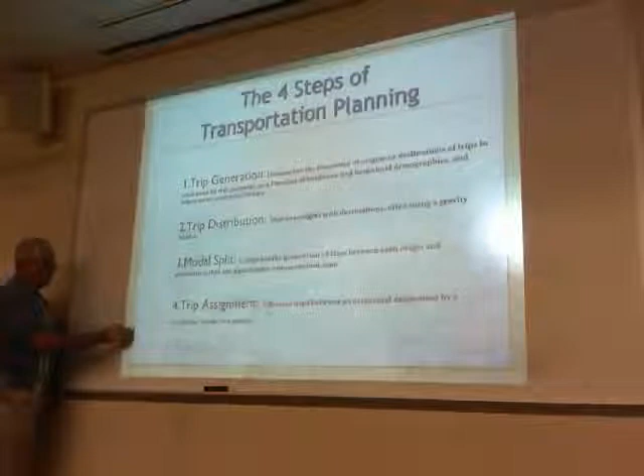So we will go to the Bible for trip generation that is published by ITE, the latest version, the 9th edition, which you got copies of appropriate to your assignment. And based on the land use, we come up with a number of daily trips and peak period hourly trips. Similarly for retail, whether it's a restaurant or what have you, the exact same. So these are generation because they're coming out of residential. For the retail, it's attraction. How many people come to the mall, to a shopping street on a daily basis and peak hour.

Once we establish that for every zone, for the current year and the 25-year horizon, then we will do trip distribution. So I have a trip T that originated from zone I and wants to go to zone J. The computer does that, calibrates, and achieves an equilibrium of every journey that goes from one region to another. So that's step 2. Step 3 is going to do some calibration and assessment. How many of those will take personal auto, bus, rail, bike, and what have you. That's what we call modal split. That could be personal vehicle, mass transit, ferry in some cases and such.

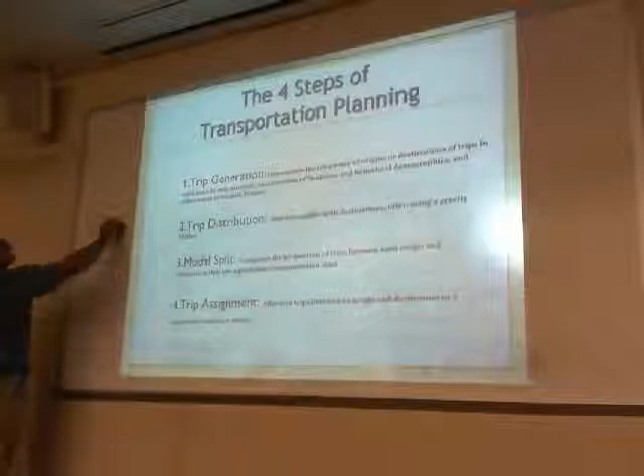Once that is done, then we need to assign those to specific roadways. So if so many trips T(IJ), now we know they're coming from zone I, they're going to zone J, they're using mode M. Now which route will they take? If they live in the UCF area and they want to go to the Dr. Phillips area in the Southwest, will they go 408 to I-4? Would they go 50 to John Young Parkway?

So based on the travel characteristics of each route, we do an equilibrium to load every route to a certain operating speed designated at that specific route. At the end, we will have a map that shows for every region, every TAZ within a metro area, how many cars go from one area to another area on each road, and how many people will be riding LYNX on each route, how many will take SunRail, and such. So that's basically my elaboration on transportation planning.

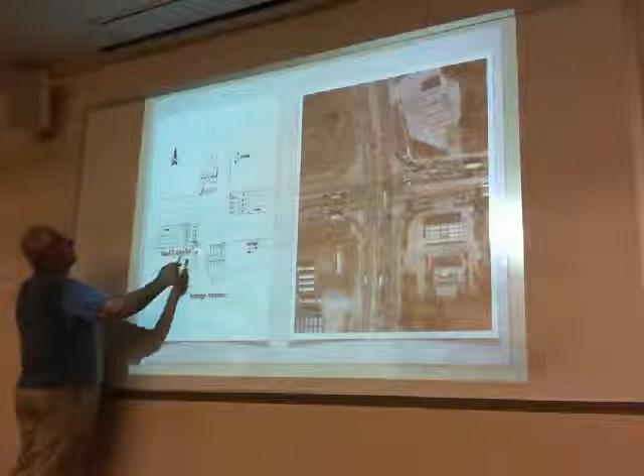So this shows the condition diagram, both from Google Earth and aerial shot, and then graphically on the left-hand side. You will see that it shows the speed limit on both facilities. It shows the median treatment. It shows the lane calls, and whether the right is a free right or a merge right. So something like that is very valuable.

Now, as far as existing condition, we will use several tools to evaluate existing condition. Existing condition means 2014 on the surrounding street. In your case, State Road 50 and the two roads that intersect State Road 50 on each side of your development. You can, based on the turning movement count, use the Highway Capacity Manual to tell you what the existing level of service is and what is its correlation with existing standards and requirements for that type of facility.

As you know, level of service goes from A to F, with A being good and F being bad, and each facility has a designated level of service standard. As you're in a more urban area, there is more tolerance for service failure. So on some downtown Miami streets, you can go as bad as level of service E and F. In the rural areas, level of service A and B. In your area, you're going to find out from the chart that I showed you.

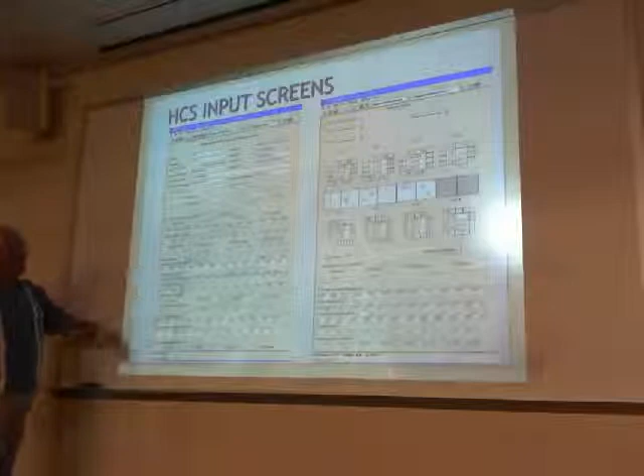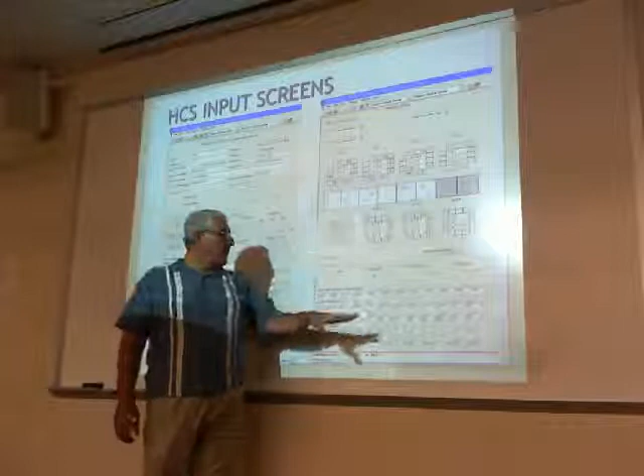So this is an HCS input screen. I'm not going to go through every box in data entry. It's very self-explanatory. And when in doubt, there are tools and help that can guide you in entering data. Once you enter the data, the volumes that you collected in the field, lane calls that you collected in the field, if you have the signal timing readily available, you can evaluate that operation. If you do not have the signal timing and phasing, it has a provision in the menu to optimize it, and based on that, give you overall level of service.

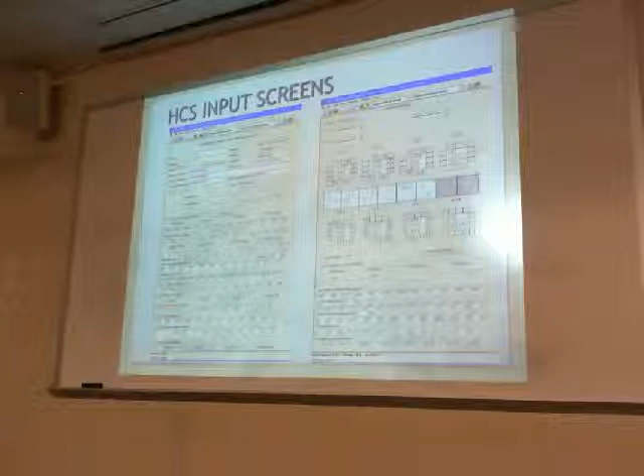It also gives you the queue at each approach, and gives you each movement's average vehicular delay. And by weighted averaging those, you will get a total intersection vehicular delay and corresponding level of service. That's the output. It gives you just about everything you need, every element that's needed for the analysis.

Okay, planned and programmed improvements. Why is it important for you all to know that? Okay, here we are, 2014, State Road 50, four lanes. Between now and the time you open your development, there could be scheduled widening by FDOT. If you are not aware of that improvement, that widening, you probably do your analysis based on the four lanes. And you're going to find out that it's operating at level of service D, and you just caused it to go to F, and you just cost the developer a bunch of money for implementation or your fair share of widening.

However, if you research MetroPlan, it gives you, under the TIP, a 5-year work program that shows what projects are committed, which means funding has been secured.

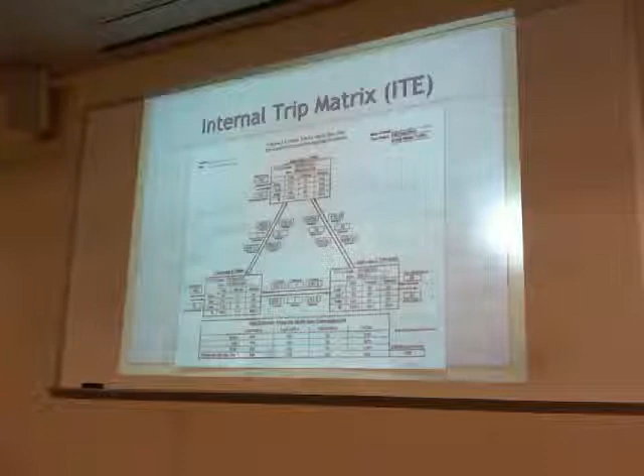As for passerby, it is obvious when you are having retail on major roadways, there are folks that when they left their home, they're not intending to stop at the facility. However, when they see it, they may come in, in the case of fast food or a bank or such, on the way to work. So those are unplanned visits to the retail side of the development. We call them passerby.

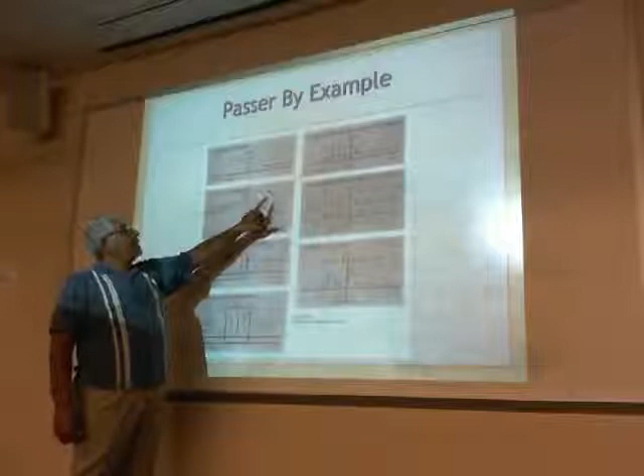Now the calculation is not quite that simple. And I want to walk you through this example. So we have got a site, and let's assume it's PM rush hour, peak direction is this way. 1,000 cars going this way, 200 going that way. We go to our ITE for passerby based on the type of development we have. It tells us 15% of our attraction is coming from passerbys.

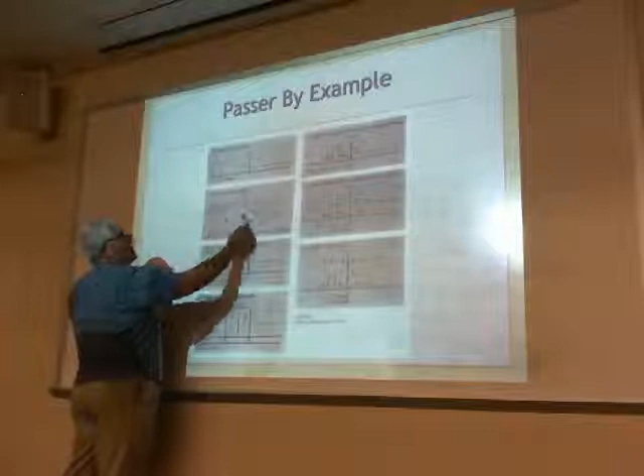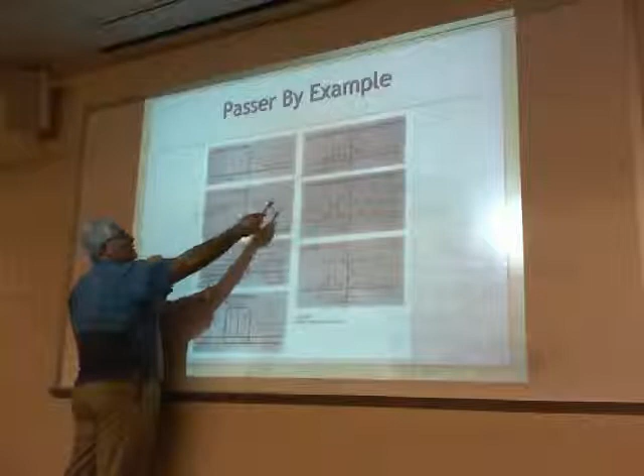And then based on the trip generation we already calculated for our site, we have 400 total cars during peak hour, with 200 coming in, 200 going out. So 15% of these are coming passerby. 15% of those is 60: 30 entering, 30 exiting, making 60. That's step B.

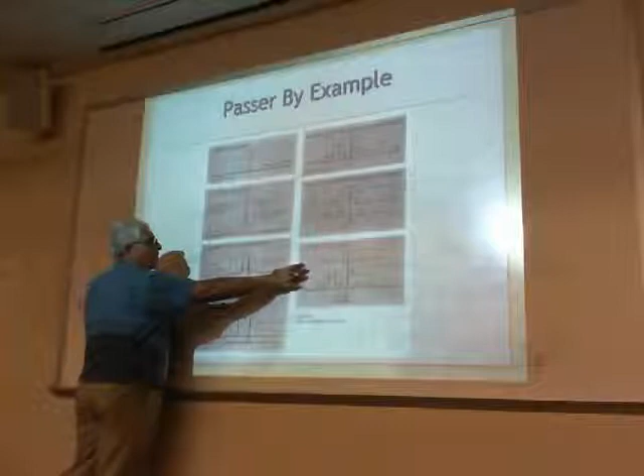Non-passerby: the graph that we have given you, your distribution map, shows the percentage of vehicles going a certain direction coming in and out of the parcel. That is given. So for this particular site, we've been told 80% of the traffic comes and goes from the east, 20% is coming from the west.

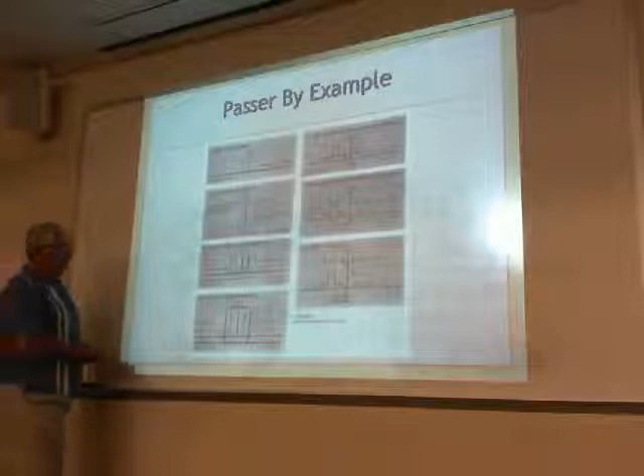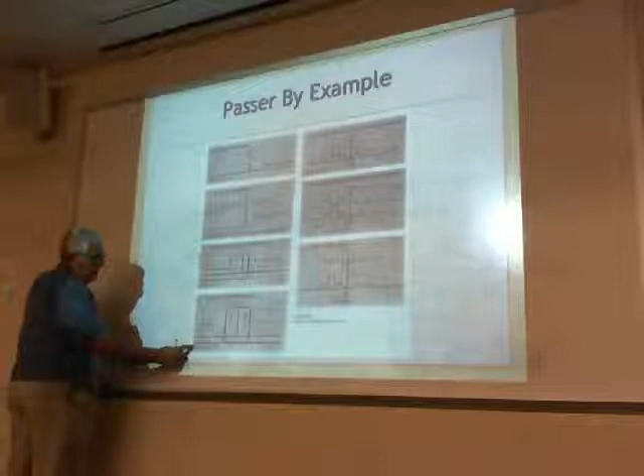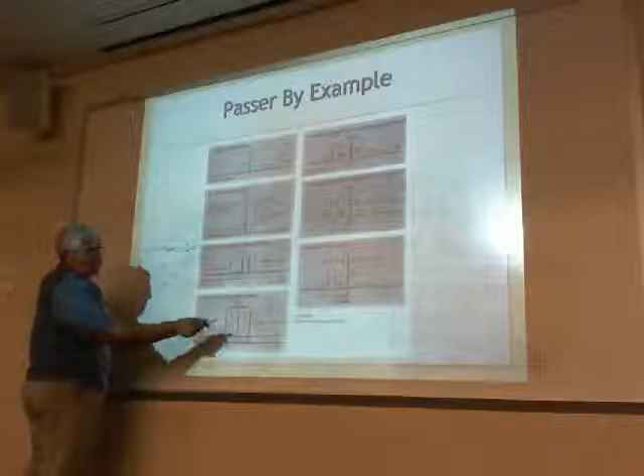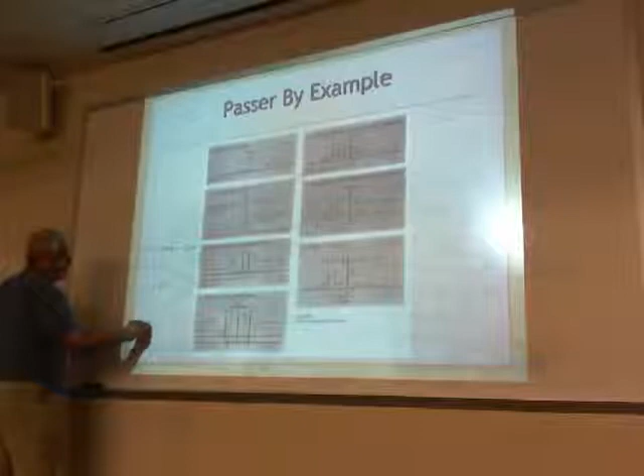So that is given. This is from generation. This is from the passerby table. Here, as far as passerby goes, since our volume, this 1,000 plus 200, so total is 1,200. What percentage of them are coming from here and going that way? It's 1,000. So 1,000 over 1,200, which is 83%. That's that 83%. From this direction, 200 over 1,200 is equal to 17%. That's the 17%.

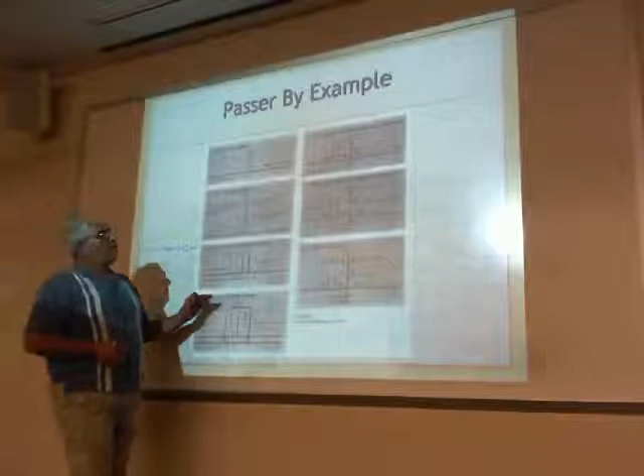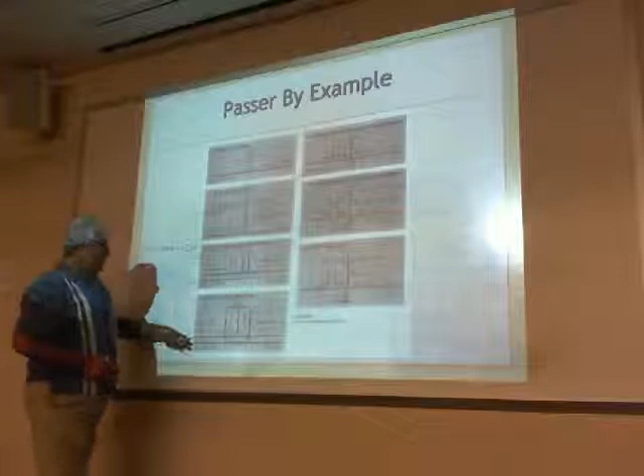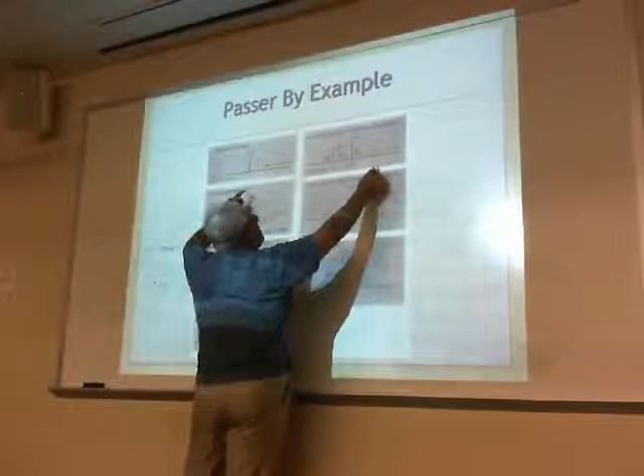So we got that. Now we've got to break it down. So the total that comes is 200, with passerbys. I have only 170 coming. So 170 times 20% is 34 that's coming this way. And then in the other direction, 170 times 80%. This here comes from that side.

Are we lost? Who is not? Who is? Okay.

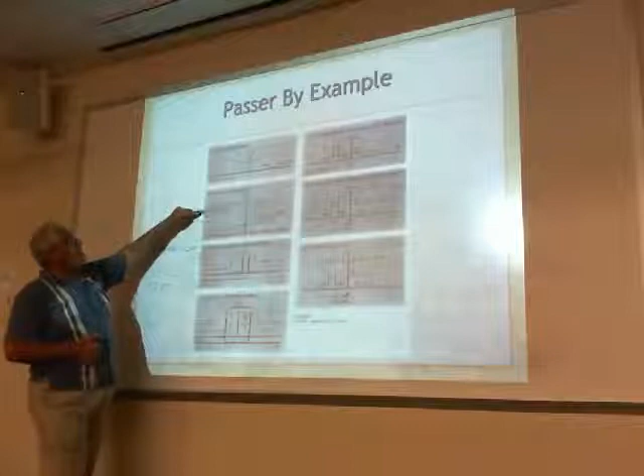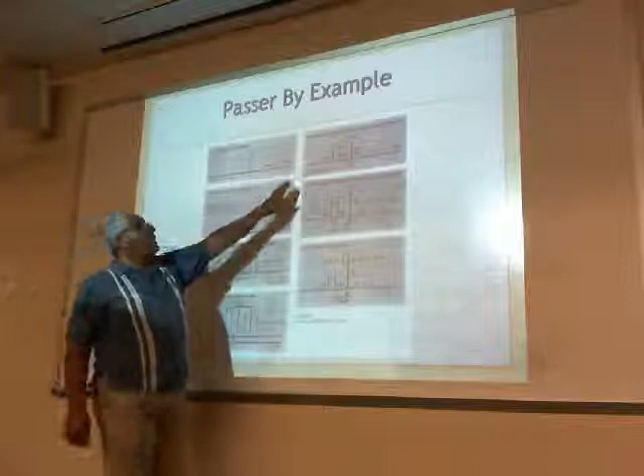So that 170 is basically 200, that is total, minus passerby, which was 30. So the 170 cars coming in and going out are not passerby volume. So we are not dealing with 200 anymore. We are dealing only with 170. And we know 20% of them are coming this way, 80% coming this way. So 20% of the non-passerby 170 are coming this way, 80% of them are coming that way. Is that better? I see some nodding. I see some big question marks.

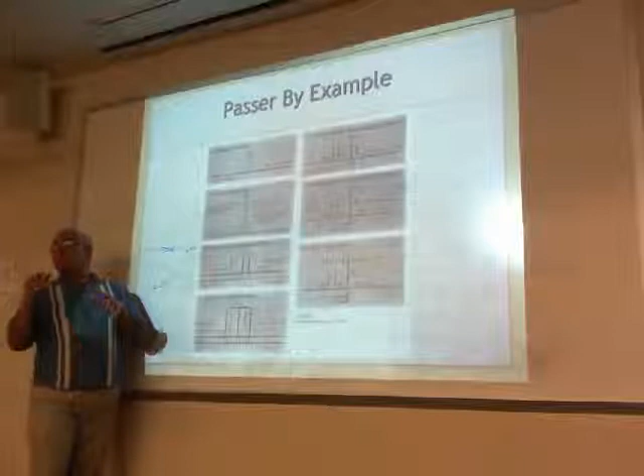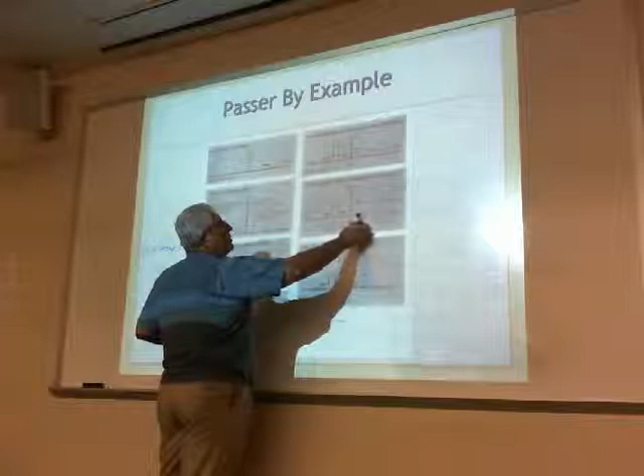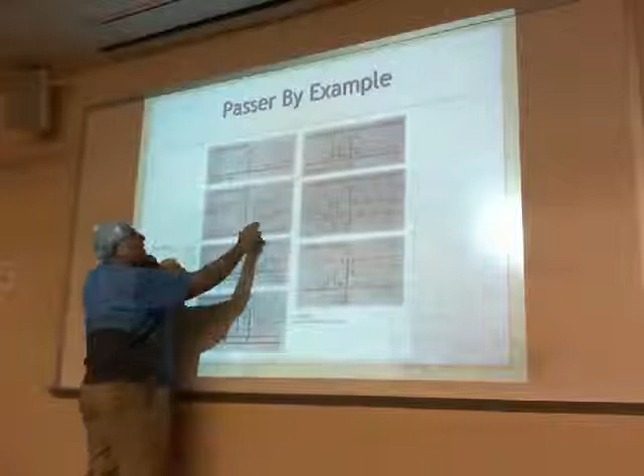Now, let's deal with passerby. We had 30 passerbys coming in. 30 times 17. You remember the calculation? 17 percent here. So that's 5 cars. And then coming from this direction, 30 times 0.83, 25. So 25 come from this way, 5 that way, total 30. Going out, 25 and 5, that's my exiting 30. So I have that. Now we do math.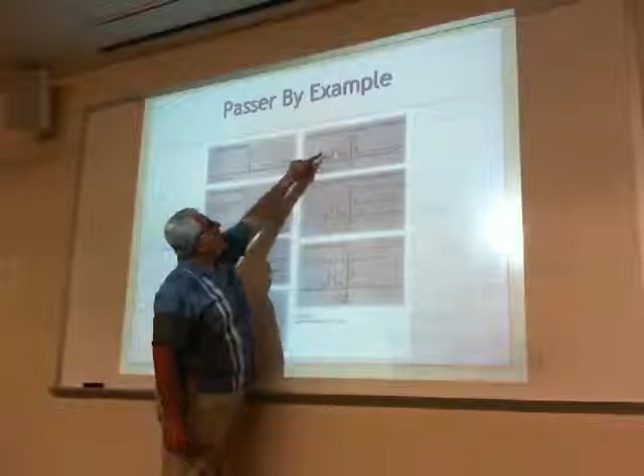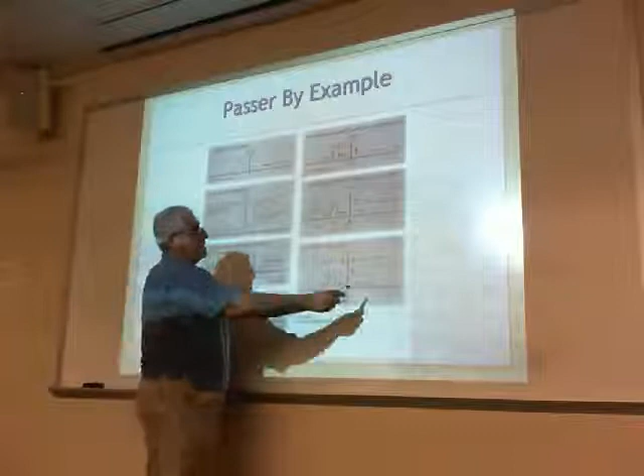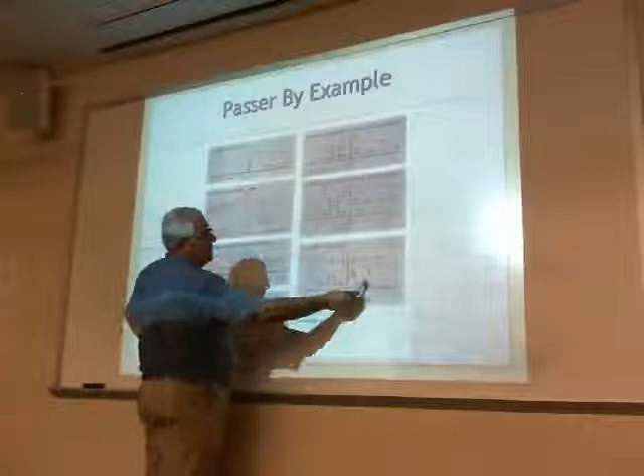It was 200 total. If you add 25 and 34, these are passerby and non-passerby, 59. 5 plus 136, 141. And then coming this way, just add this figure, that would give you that. Then when you subtract that from your 1,000, that would give you that, plus your 200 that you are generating. So that basically is your final volume after you take into account passerbys and your generation.

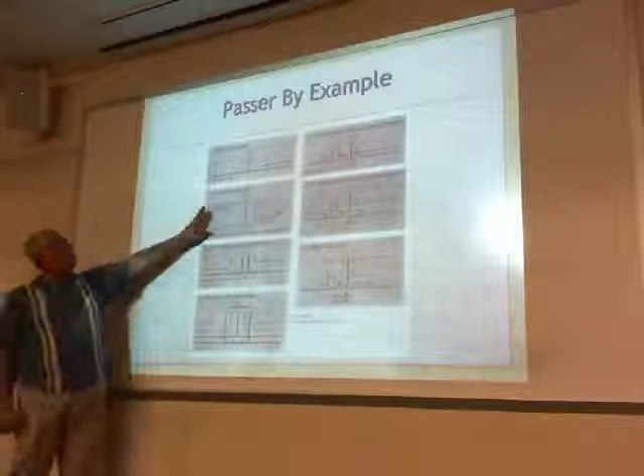If you have further questions on that, email and send it forward. You will be doing this exact analysis for your assignment. Absolutely. It won't be those exact figures, it will be numbers that you develop based on site-specific stuff if you want to go through this. You need to understand the concept. And it's rather logical. There's no magic about it. It's just common sense.

Yeah, so we've given you that, we made it easy for you. We've given you the solution from computer output. The computer output, if you look at your site, when you add those two numbers, they are 100. Basically, it looks something like this. That being your site. And here is just a bunch of streets. So coming from your site, there is X percentage that goes this way, 1 minus X that goes that way.

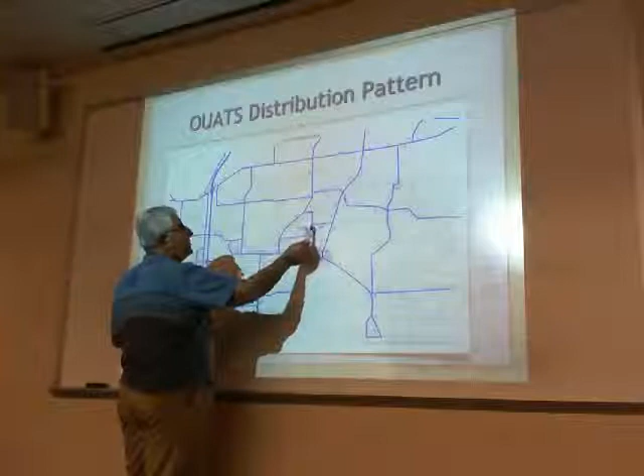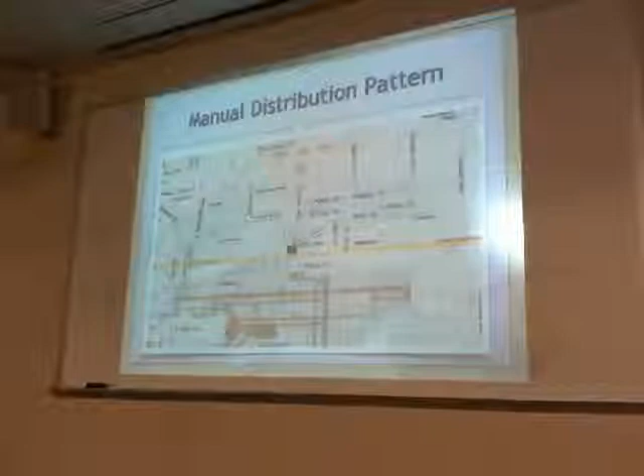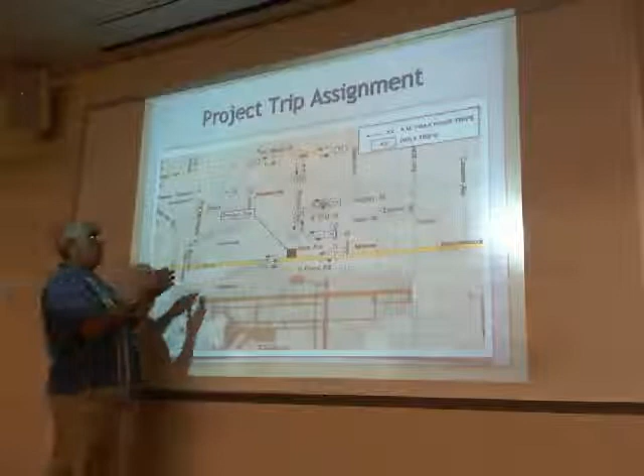And then you are basically concerned with the areas where these percentages are high enough to make an impact. This is the manual distribution. So once you have those percentages of where they're going to go, you already know what the total is in sheer number, in the number of cars. You use those percentages to distribute your trip generation volume.

Background: so you go to the Orange County or FDOT site and get the current year volume for State Road 50. But the volume won't be the same in 2018 when you open your project. So there are 4 years, give or take, of natural growth. And the way to predict that volume is to use historical data.

We use historical data. So you will go to the Orange County site and that site. For that count station, you look at the pattern of the volume over the last 15, 20 years. You will plot them out or use some kind of trend analysis. They usually look something like this, not exactly, but then there's a little of this going on.

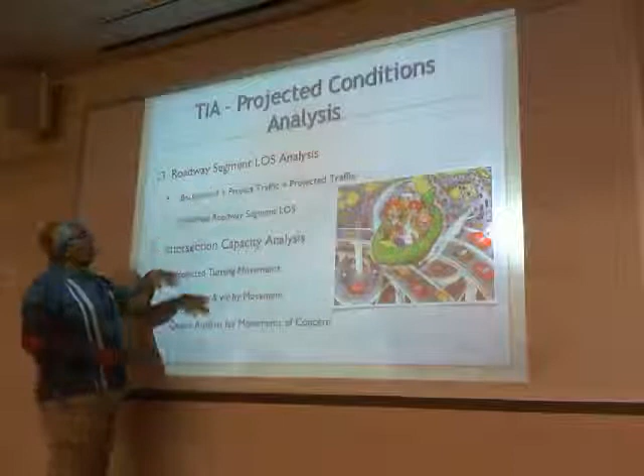So, background is what is existing plus growth from now till opening, equal to projected. Okay, a facility has 36,000 ADT, average annual daily traffic, in 2014. We open the road in 2018. It grows at 5% annually.

Future is equal to present times (1 plus i) to the n. Future is equal to 36,000 times (1 plus 0.05) to the 4 years. When you do that, give or take, you come up with 40,000. That's the concept. So that gives you that.

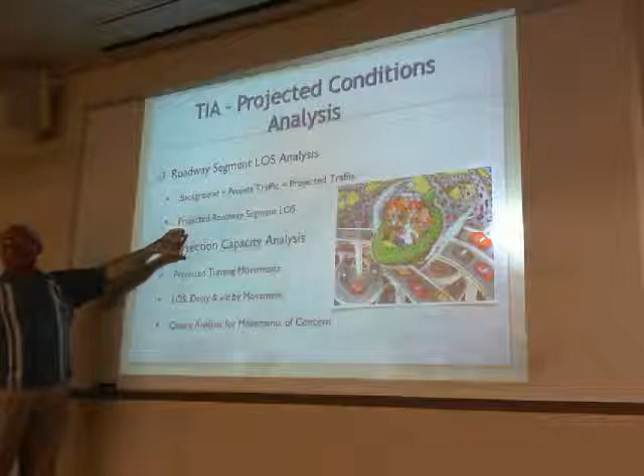Then you would do projected roadway segment LOS. Now to this here, you need to add your project contribution. This is pre-development or background. And then you come up with a pre-project, post-project, or opening year. That's what your before and after analysis is, to tell us what the impact is. Right? Yes? No? Maybe?

So this is a sample of the projected condition LOS, level of service. Here is the projected traffic movement after you subtract pass-by, you subtract your internal capture and the pass-by and such. And then if level of service has deteriorated based on your development, you need to come up with a mitigation plan. Mitigation plan is...

Or you could say my project caused 5% of the deterioration. How much is the cost of widening from here down to your site? Here is the segment that has failed because of your development. You estimate what's the cost of sustaining that, multiply it, you contribute 5% to the deterioration, and that's your fair share cost.

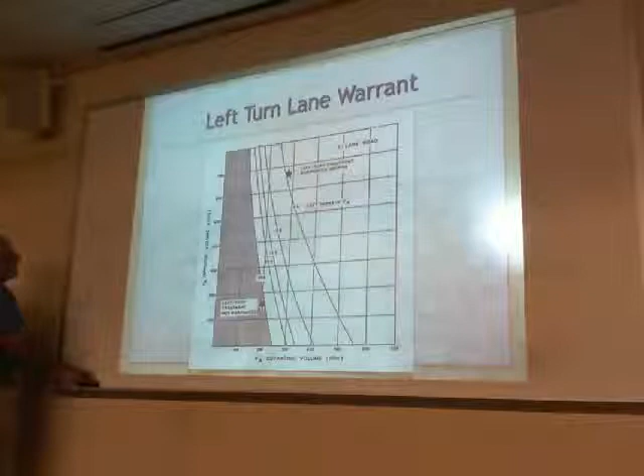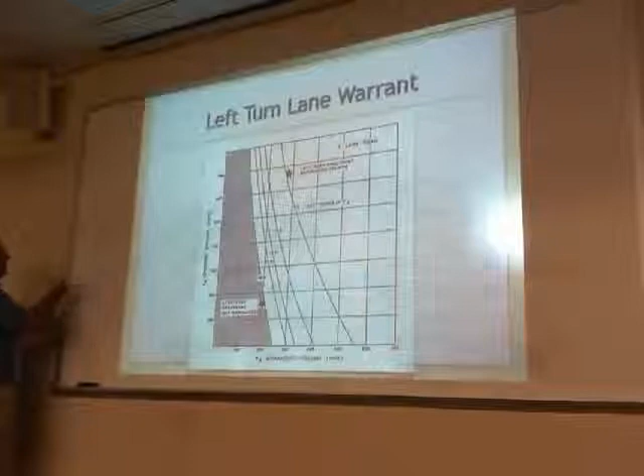And here are sources for left turn warrant and right turn warrant. I have provided you the sheets from NCHRP 279, and there they are. You enter this chart with the opposing volume and your volume, and based on where those two volumes intersect, it tells you whether you don't need any turn treatment, or you may need turn treatment. Could be continuous, or it could be a taper. So that gives you that tool to evaluate that.

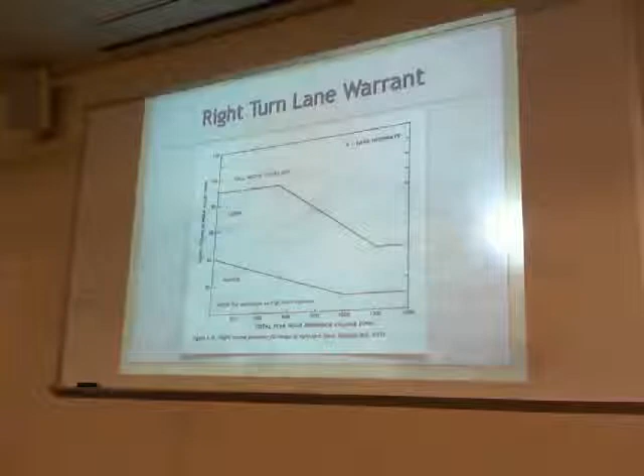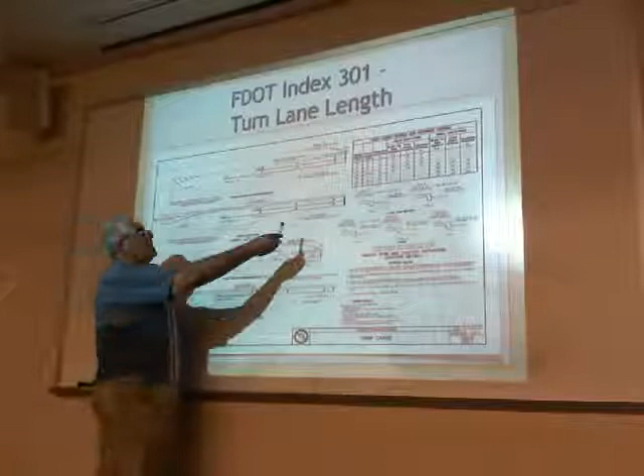Here is another simplified version of that. This is the same thing for the right lane, whether you need to add a right lane or not, based on the cars that are coming out of your development or going into your development. Basically, you need two volumes. This index from FDOT gives you guidelines on the dimension of the storage and the taper. So use this in laying out your entrance and exit to your site.

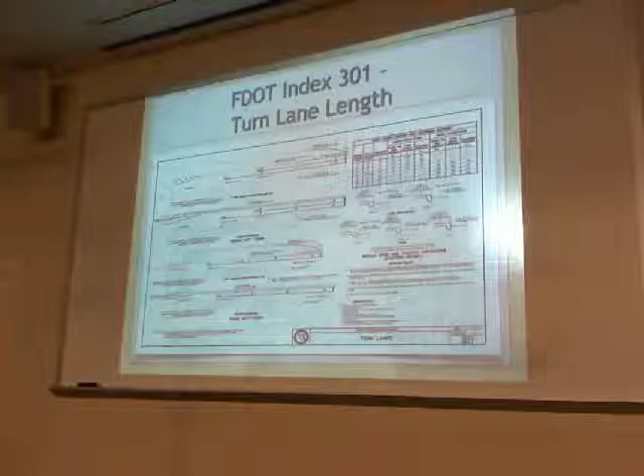Typically, they're gonna wanna see that on a landscape plan to make sure you're not putting brush, shrubs and trees and things like that that will obstruct the view, or a sign, entrance sign or something like that. Your force main, your pumps, usually many development engineers put those near the entrance for easy access and stuff like that. The pump station, the lift station. Keep those out of that area.

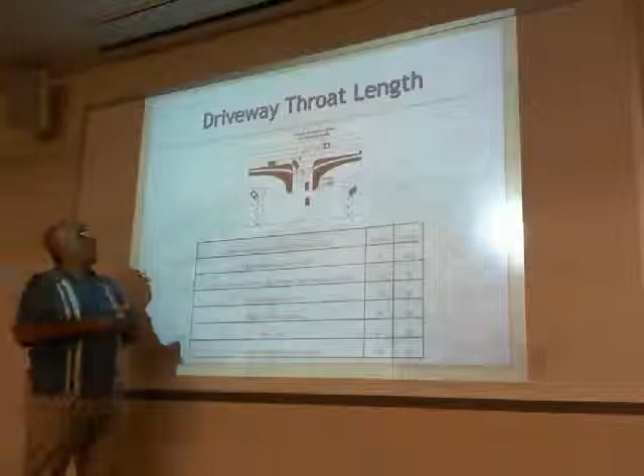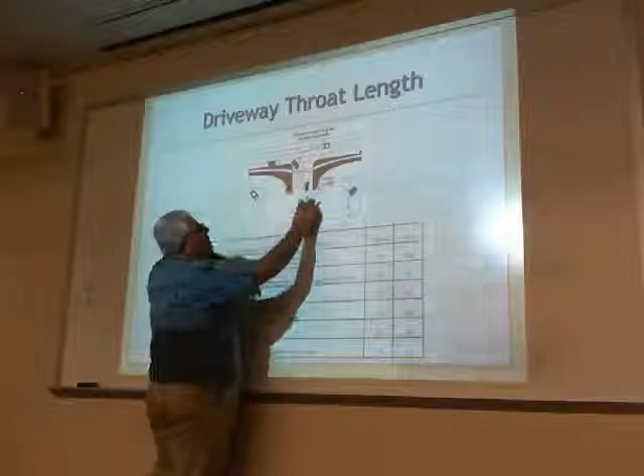One thing I want to bring to your attention that was a problem last year. This area here is the main entrance, different part of coming and going out. Be careful as far as the circulation, how you lay out your parking, and how far the internal driveways are. My point is, if you have a driveway that comes in here and you have a queue stacked up, you're going to cause another bunch of problems. So if you can allow these cars to come out further and join the back of the queue and take this conflict out, just...

Okay, so signal warrant. You cannot just arbitrarily go and say, hey, my intersection is going to operate best if I put a signal there. They don't just give you a signal. You have to go through this signal warrant process. But due to your project being proposed and not having 8-hour volume down, 4-hour down, as TIA, we do an analysis at peak hours, so you can do this warrant and see whether the signal is warranted.

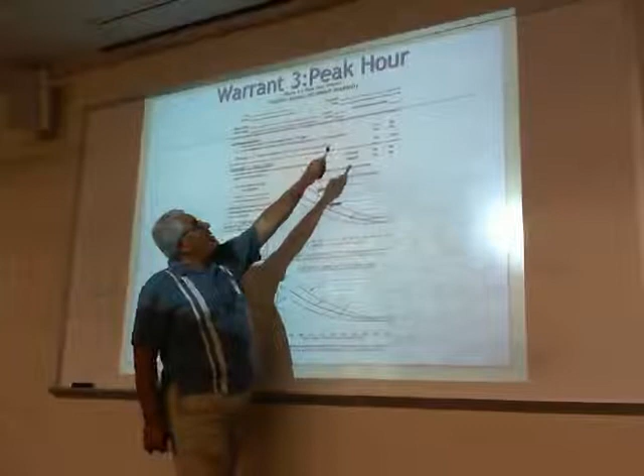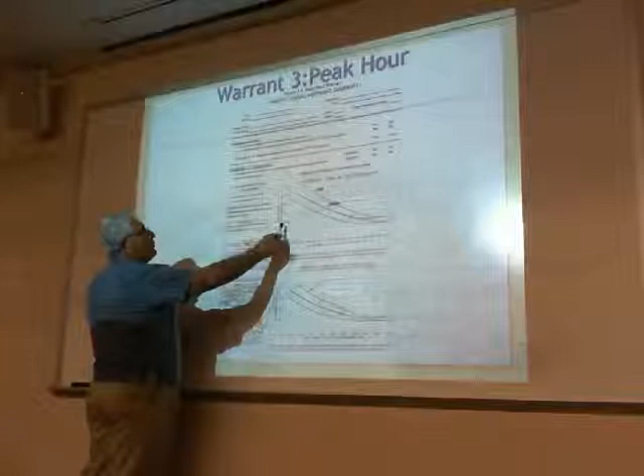And the form that we use is this one here. Please fill the form completely: city, county, major street, minor street, number of lanes, what is the average approach speed, put the main street volume, put your development volume, and make sure you read the discount.

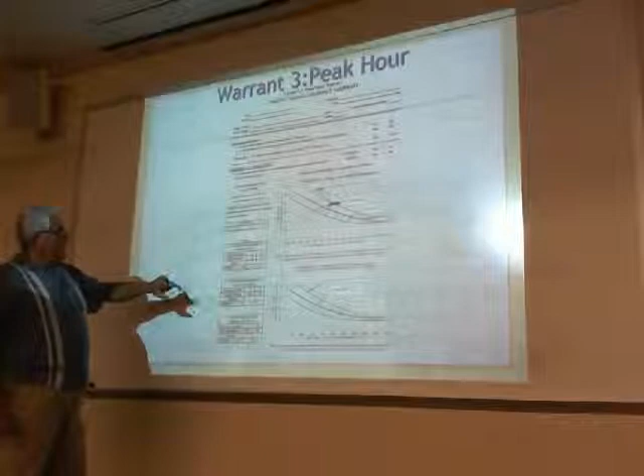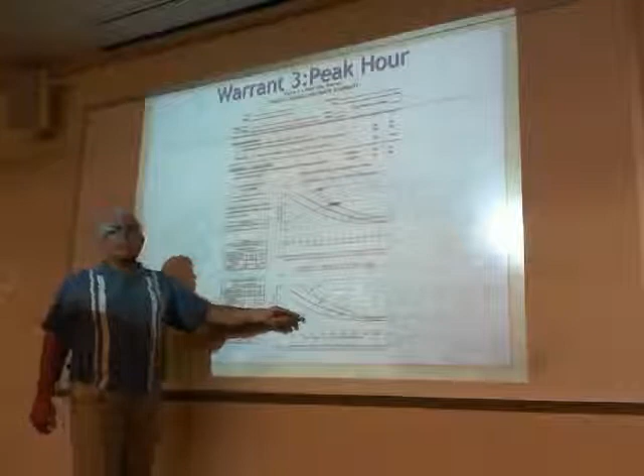There is a lighter version, this one, 70%. See whether your project qualifies for that, because it's easier to get a signal under 70% volume. That's it.

Okay, yeah, we go to the last part. As we said earlier, this is the most read one. Be concise and give a good summary of what you have done. If there are any mitigation or improvement you assume in doing your post-project analysis, this is the place to outline that. And for the sake of others, if you observe any unusual or noteworthy conditions requiring attention, that is where you bring them up as well.

For example, as far as this one case, very fresh in my mind - we had a development where there was no median opening for the cars, and we ended up with the right out. But through our process, we realized there is a proposed brick and mortar and retail coming across, and they are following us, and we were able to negotiate a median opening with DOT and relocate a couple of median openings here at the back. So that's where things like that come out.

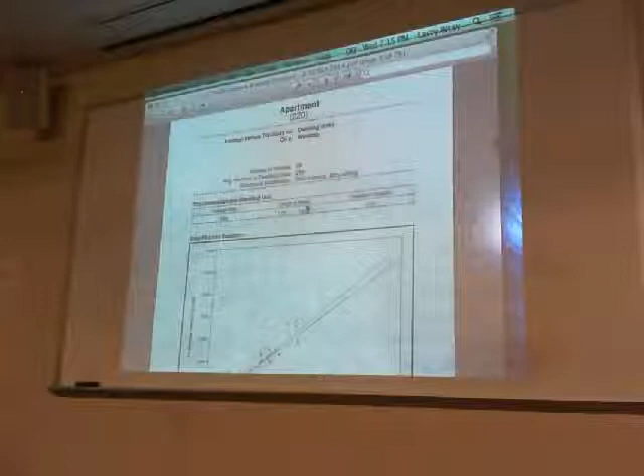Then you've got the same thing for another one, peak hour again. Then you've got apartments. And there's apartments, shopping center, and office. They're all in there.

Okay, so with the ITE numbers that you just got there, you will calculate these numbers here. These are the raw data. It basically says your office building, in this example, generates a total of 2,000 trips per day. Office is 400, retail is 2,000, residential is 200. Those are just numbers I made up, so use those in this example.

Since I'm looking at a daily estimate right here, logically speaking, over a total day, whatever comes in also goes out, and it also tells you that on that sheet. If you go back in ITE at the top, it'll tell you during the daily trip what percentage is in, what percentage is out. For daily it should be 50-50. Peak hour it may be something different, maybe 60% in, 40% out. So if you get a total of 1,000, you have 600 in, 400 out during peak hours. So just make sure you pay attention to that percentage when you're doing this for the hourly data instead of the daily data.

So you've got 2,000, which is split 1,000, 1,000; 400 split 200, 200; residential 200, which is split 100, 100. You now want to know what percentage of that is not actually coming from the roadway. What of it is internally generated?

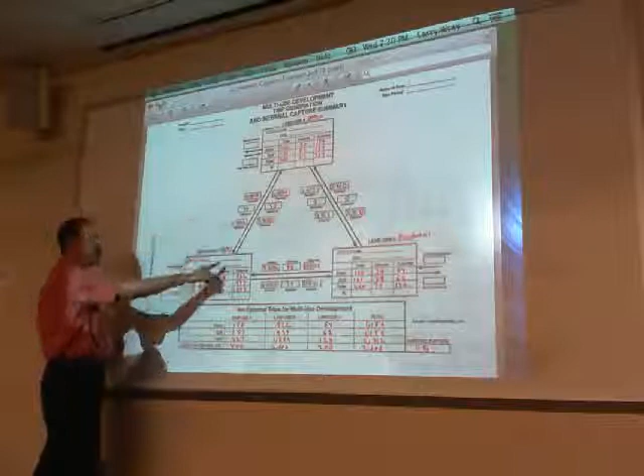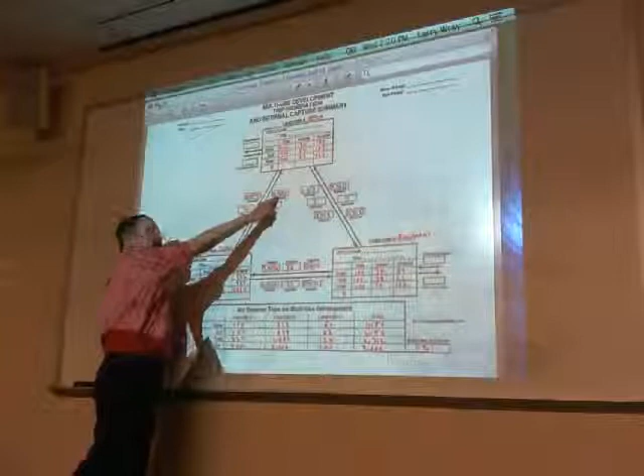Does that make sense? So again, when you do 7.1, this is going from a use to another use. So if I've got labeled retail, I'm going from retail to office. This arrow here is going that direction. So from retail to office, I fill in this box. When I flip the chart over, use 7.2, I'm going to office from retail. So I'm going to office from the retail. That's this top box, that's the 15%. So that fills in both of those numbers there.

That makes sense? So now you go through, you fill out all these boxes. And then you look, and this is just telling you what it's capable of sending, not what it's actually sending. So what this is saying, now that I'm going to look at it, retail has the ability to send 30 trips to office. Office has the ability to accept 30 trips from retail. They happen to be equal in this case, so I write down 30. Down here, though, I've got retail has the ability to accept 40 trips from office. However, office has the ability to send 44 trips to retail. You can't take more than you can receive, so since the max you can receive is 40, you put 40 down. Does that make sense?

Yes, I have a question. How is it to office from residential when there is value non-applicable?

So which one is that? To office from, so residential? 7.2, to office from residential.

Yeah, I guess theoretically you'd think there'd be something there, but for whatever reason they don't calculate it there. So we just have to use what's on the table. That's true.